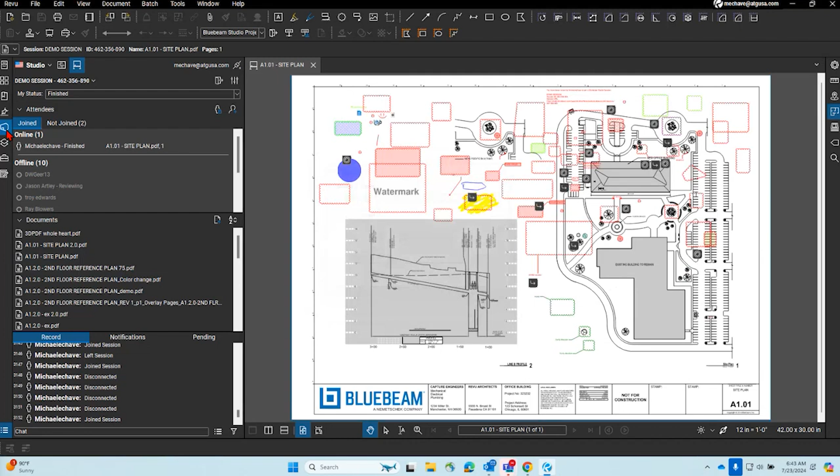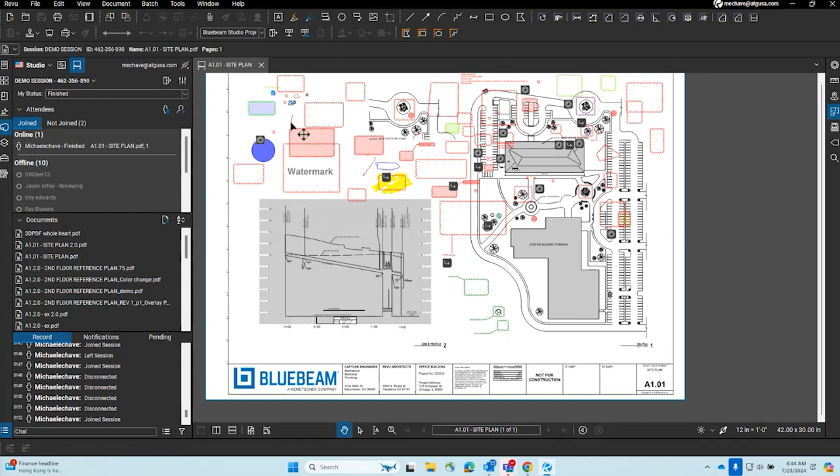I think the one caveat for me, maybe still leveraging the iPad, would be the ability to get tool chest, because you can still have the free non-paid application on your iPad and in a session - this is the old way, in terms of being able to have full access to sessions and the capabilities to mark up in that session on the iPad only. That's no longer the case for the reader version of Revu and getting access to a session. On iPad, that is still the case, meaning you can still access your tool chest in a session. You cannot do that in a session on a free version of Revu, which is their reader version.

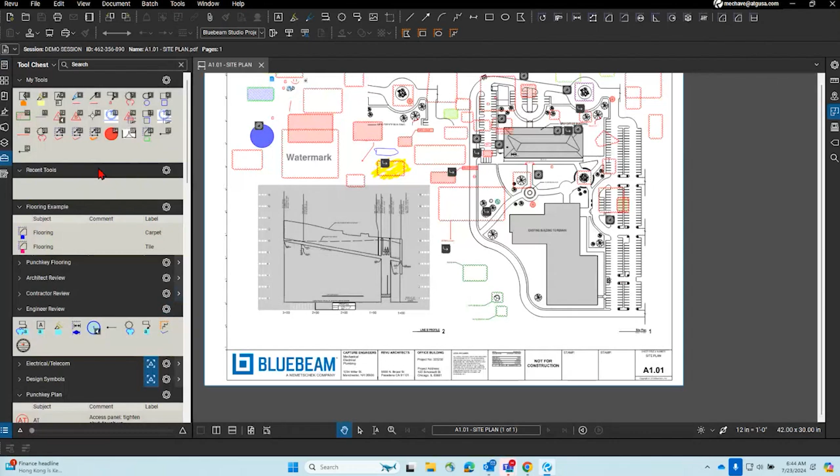So coming back into here, the ability to access your punch list in that manner - if you're going out into the field on your phone, you still have access to a session, which is the new way. So if I'm going out into the field and I want to mark up the same site plan, I can click on this one.

This is the free version, because what I always like to offer is the ability to work with subcontractors. Subcontractors are going to say, I don't want to pay for this - they're not going to automatically say that, I'm just going to go with that as my character for today. I'm not going to pay for this, Jason, but I need to coordinate and mark up with you. What can I do? They can download the Bluebeam Cloud app on their Android device or iPhone, and they can still mark up - they can use rectangle, cloud, ellipse.

You can use a vector pen, which you can't do on the free version web-based app. But anyway, there's text, cloud, callout, highlight, pen, cloud plus, and image.

So I can place an image from camera, or do photo library. And of course my app isn't working ideally, so I'm going to update it on my phone. Keep current selection, tap and drag image - okay, so it's going to be at this building existing area here. How long does it take to populate?

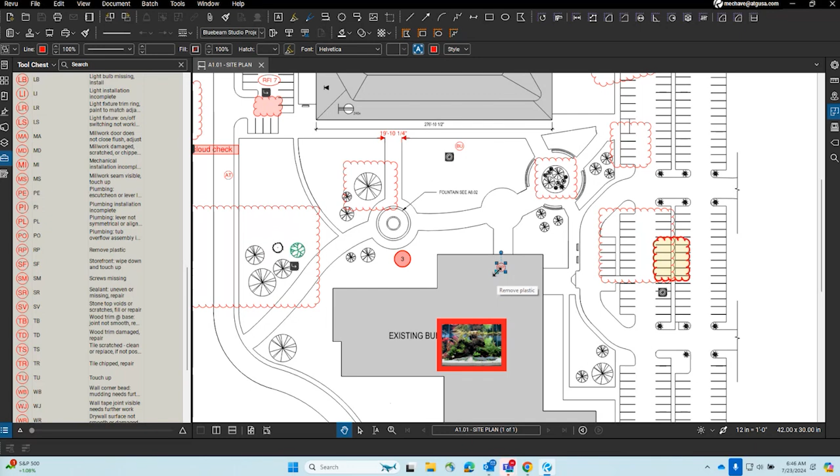I can do a line width - whoa, look at that. So it will allow you to place a photo, which is full res on my phone. Is it full res in here? It's good from what I can see. Yeah, it's almost full res.

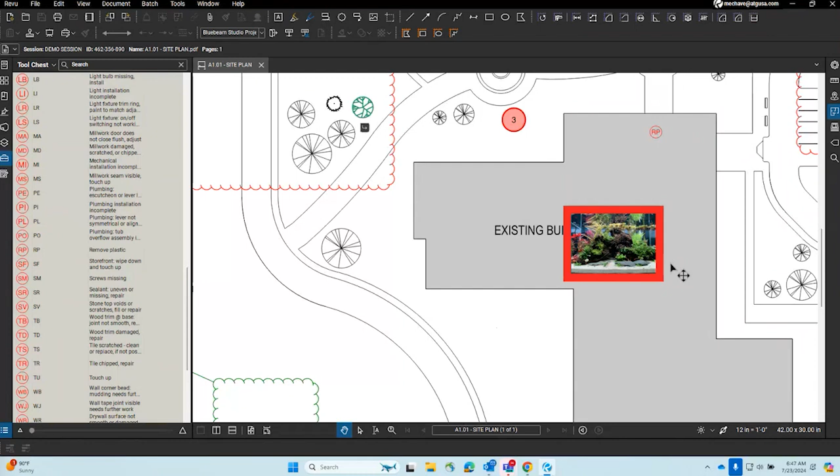So you can throw a photo on the PDF, but can I attach it to an existing markup? That would be my ideal circumstance here. So let me - oh, its markup's locked by author. If I select the image, can I do anything? No. Let me place a markup revision cloud right below it - so there's a revision cloud here that I just placed from my phone. No, I can't attach it. And remind you, this is a free version, and I'm sure Jason has signed into his regular one, so I don't know if it's a little bit different in terms of being able to do that.

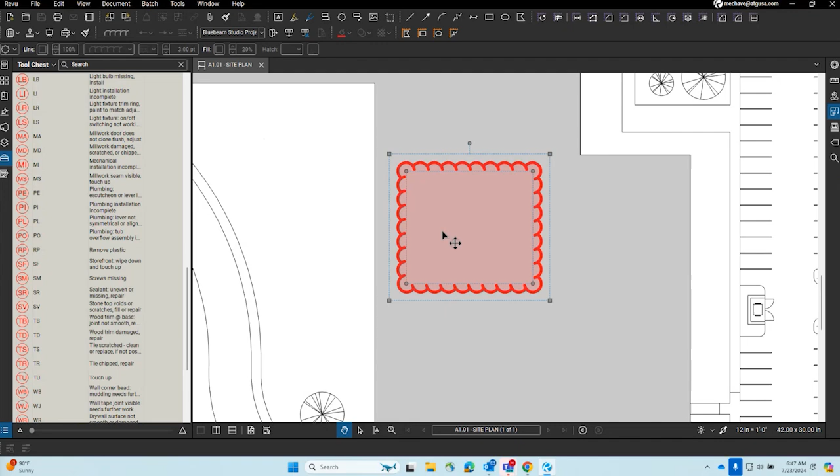But on the web-based version, I remember you were able to change statuses. So if you're out there in the field, you can take a photo, place it, and mark up for any issues while you're out there. It's great graphics in terms of scrolling in on your phone - it's the same type of visual capabilities as if I were to zoom in on the actual desktop application. So the phone does work from that perspective.

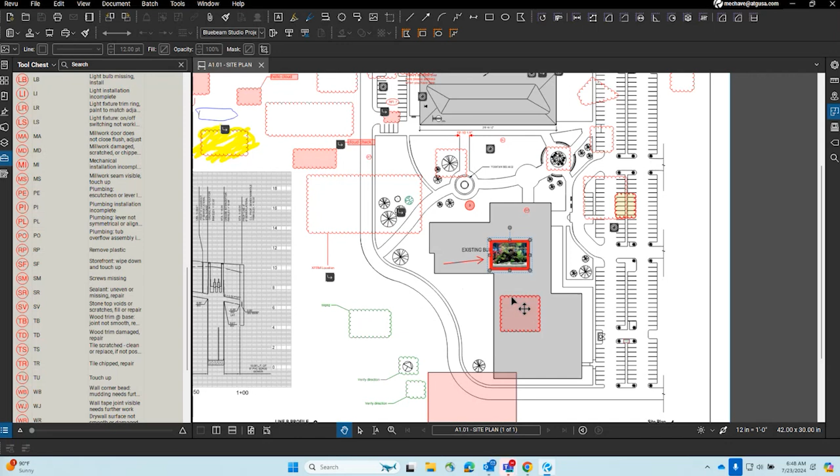You can attach photos - that's the free version if you wanted to invite sub-consultants. And I'm going to assume that it's going to be the same for the paid-for version on your phone for sessions, for markups, because I remember when I signed in first, it was just those options. Is that correct? I believe so. There was talk originally that there was going to be some limitations, but if there were, they're going to be pretty minor.

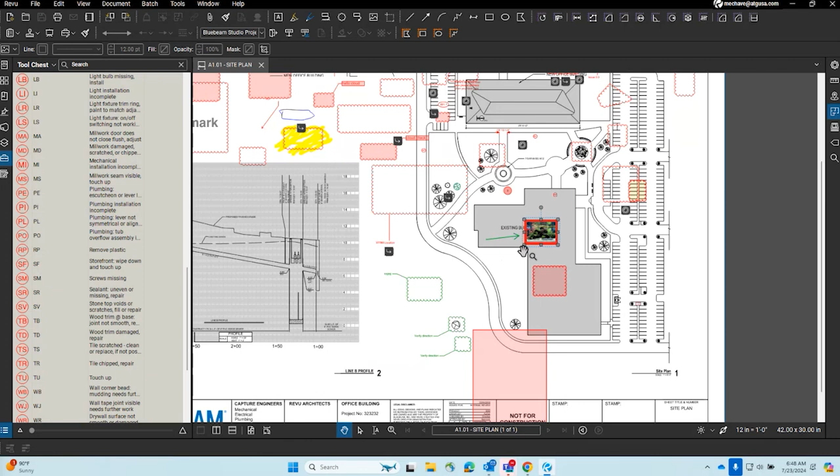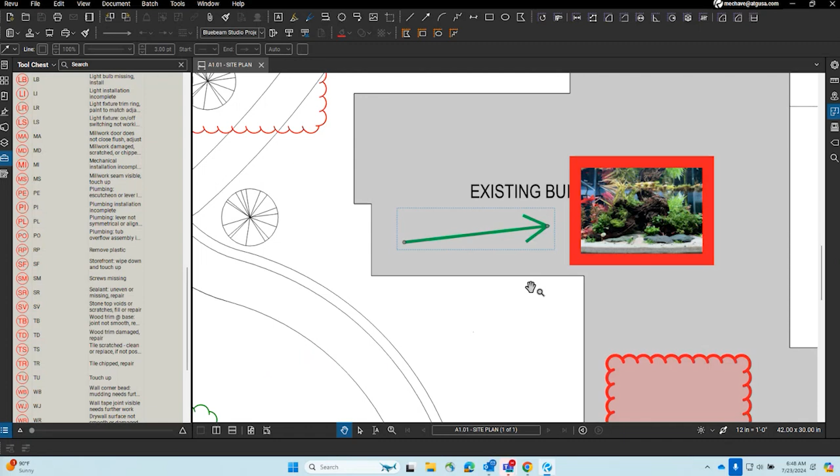So I just made a change - I made that arrow on my phone. It is a little bit of a different workflow. When you first place things, it's going to default to the deep red color. And then there isn't the same properties that you would see in Revu. So in order to edit a markup, you need to hold over it with your finger, and then it will give you the option to either edit or delete.

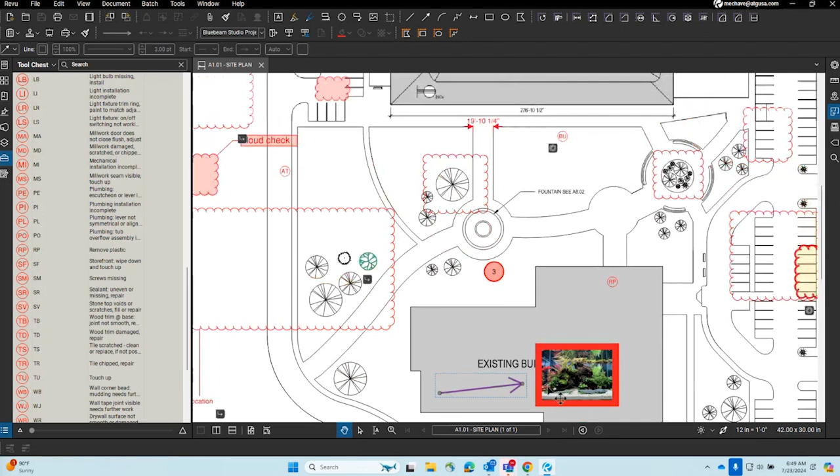If you choose edit, it gives you the capability to change your line width or line color. So I went from green to purple, and there we go. Let's do that again—if I go from purple to blue, you're seeing that happen pretty quick, and I'm doing that from my phone.

Michael's been playing on his phone, but we're still connecting to the Bluebeam Revu desktop product. So if you're in the office managing things, you can be talking to folks on speakerphone, Teams, whatever you need to do, and coordinate even easier, seeing those things in real time.

That's been something we've talked about for a while—the days of sending somebody out to a job site, waiting until 5 o'clock for them to come back with paperwork to sort through. There could be issues found, meaning they have to go back to the job site, which becomes a waste of time—drive time, gas money, all that other stuff—when we could just coordinate this way and be more efficient with our workflows. That's the underlying drive to Bluebeam Revu: let's be more efficient with everything. This is a prime example of that.

They've made this even easier by allowing this to coordinate with people using the website or the app. All you need is a Bluebeam ID in order to do this.

Yeah, I think one of the key factors is the versatility now, right? Because I think what most people wanted was to quickly mark up in the field, and really most of it was workarounds. And then it was siloed information too—I think that's one of the other big things.

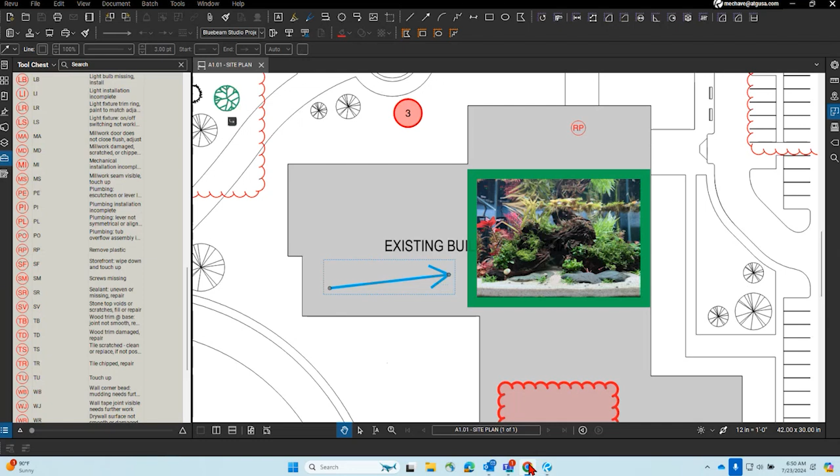If I come into here and go to apps.bluebeam.com, it was siloed information specifically around the fact that if I use projects—Bluebeam Cloud projects is different than what you're going to use for sessions. I know it's going to start muddying the water now because it's projects and sessions, but that's what you have on your desktop application. Projects is completely different than the projects you know on the desktop application—it's built around the constructability process.

But the issue with this is it's siloed information of PDFs, because you're uploading it into here, right? Folks didn't really want that—why am I going to upload into a project? Because if you think about it, we can just upload it into a session and coordinate that way, and it's single source of truth in a session.

So what are they going to do with this? Because this does have great capability to do punch lists out in the field and that type of stuff. But at this moment, now that I have sessions in the cloud, I would personally probably stay clear of this if I want a single source of truth. If we're using something different to track our RFIs and submittals, then I would just leverage this for coordination on the PDF.

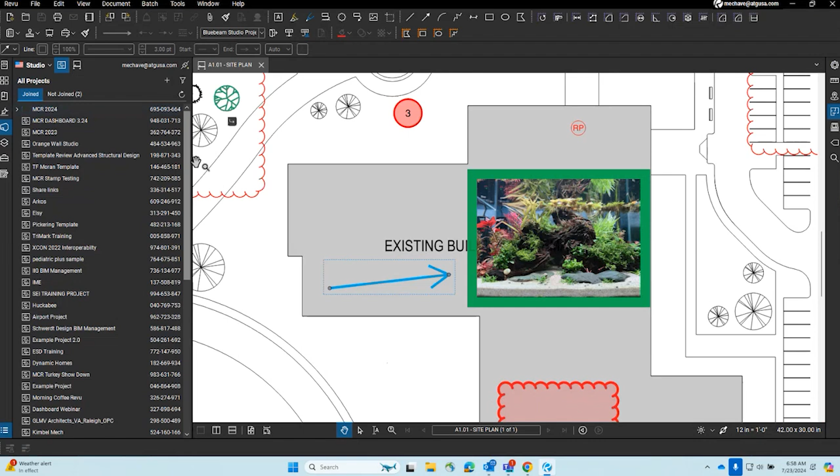It's not a real-time updatable thing. Which would be awesome, because when you're done you could just close this and it updates in your desktop application, but it doesn't. You can export it out - that's when you go to exports, you have that option to export out everything. So go to settings, export your data. I can say, go to that Studio project, but it's not like we'll go look at it. I'm going to store it in here. We're gathering your project data, which will take a couple of minutes. As it goes through and grabs it, we'll look at it, because it's going to be different. Yep. It's exporting, which is not what I want - I want it to just be connected.

So as we wait, I got a squirrel moment. We haven't squirreled in a while. I take it back, we squirrel all the time.

Going back to the Esri conference and talking about connected workflows, there's a new program from Esri called Esri Excalibur. Cool name, right? It allows real-time collaboration between your desktop product and a drone. So as the drone is flying, you're seeing the data in real time, and you can mark up and tell the pilot, hey, you missed a spot, go back over here. Yes, there's a pilot piloting the drone. You can collaborate in real time as that drone is spitting out video data.

So yeah, pretty cool. Baby, we're getting close - super mega ultra cloud. I feel like we could make an acronym out of that. I don't know how long it's gonna take.

And part of that, you're streaming, we've got VPN, we've got other limitations. You can't blame anything here. It also sends you an email too. Yeah, so here's the email.

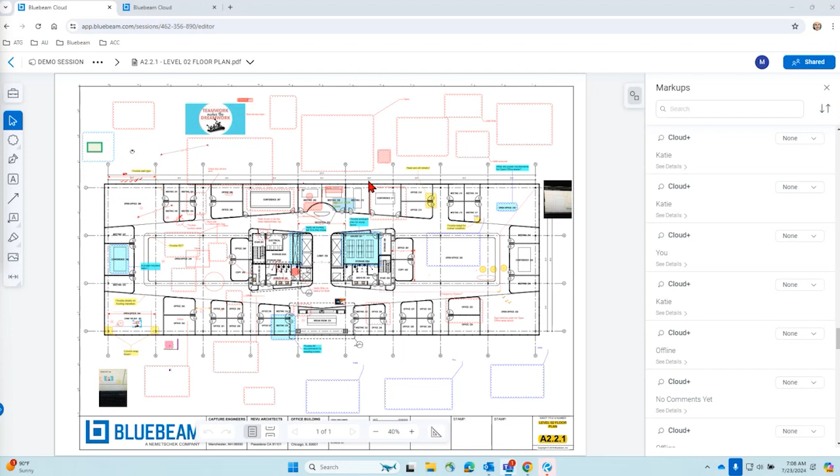Yeah, there are some very passionate people with karaoke that work here at ATG. Oh yeah, we're gonna have to get old Matt Lynn up there. I think he promised, he did promise. What song would he do? Start thinking about it. I don't know, start doing. You got a lot of road trip time where you can practice. There you go, Matt's driving.

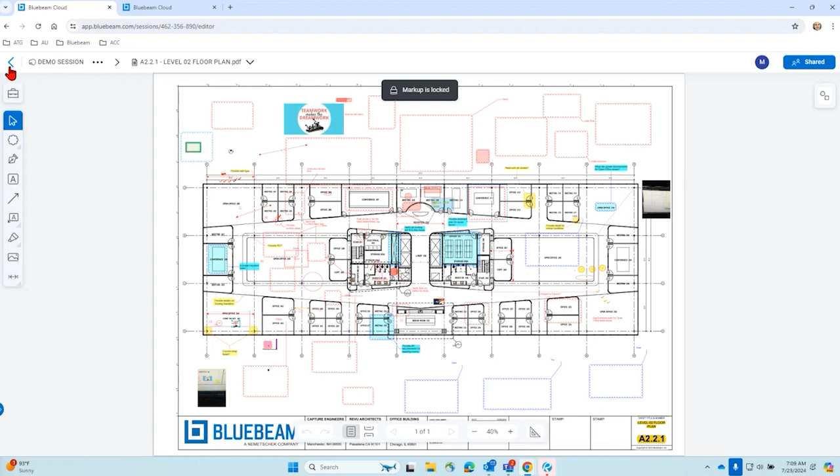So back into projects again, I don't think maybe some folks have used this in the field. We weren't trying to downplay it at all in terms of it not being a good solution. It is, if you're going to leverage it, as it being siloed information.

Siloed information. So from there, I'm going to go to the bootcamp one because we haven't talked about this in a while, and we'll go through and leverage this from this perspective. You have the ability to access your drawings. So you're uploading it into this project platform, which does have access on your phone to leverage from documents, punch lists, RFIs, and submittals. So if you don't have a tool here—and I don't know how I want to frame this, because if I say it's free, you're all going to say, well, Bluebeam increased their pricing, so is it truly free? It's included in your subscription of Core and Complete tier to have access to cloud.

So this is a great tool if you do not have a system, or you're paying X amount for a punch list, RFI tracking, submittal tracking system. Why not use something that's already included in your lowest probably license cost ever?

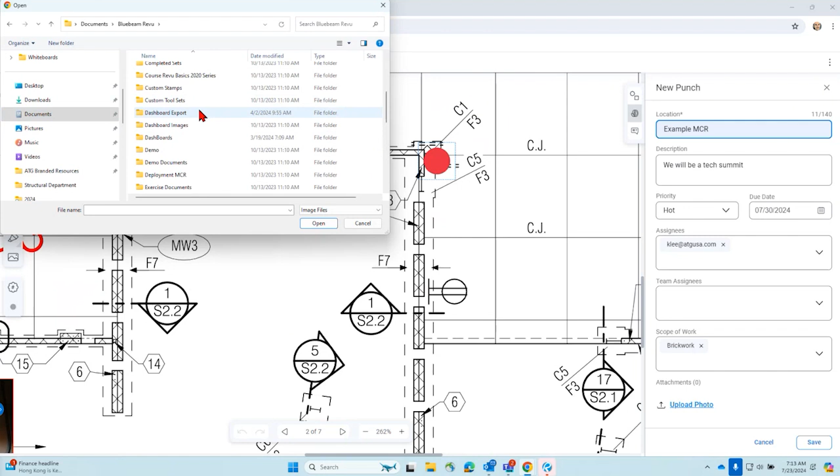Then you can upload a photo. For all of you, I just uploaded a sketch to scale video. We'll go to here. Sketch to scale, sketch to scale—where's my images? So I think it was in my demo docs here. There we go. So there's the image. Hit save.

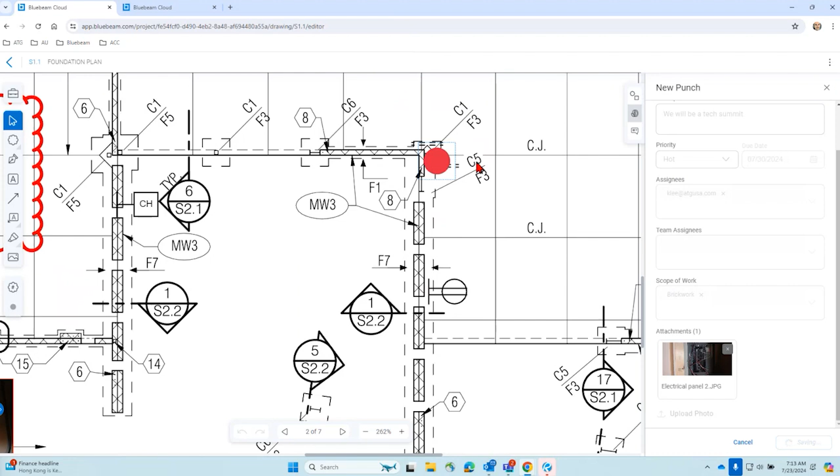And this will be part of the PDF here, but also you have a punch list area, so you can go through and track. So if I was in a different area or a different page, well, let's just go to the actual punch list area. So here's the punch list area. There's the one I just created. You can see where it is on the PDF. You can also have the image for it. And then you can also click this, and it brings you to where that was on the PDF itself.

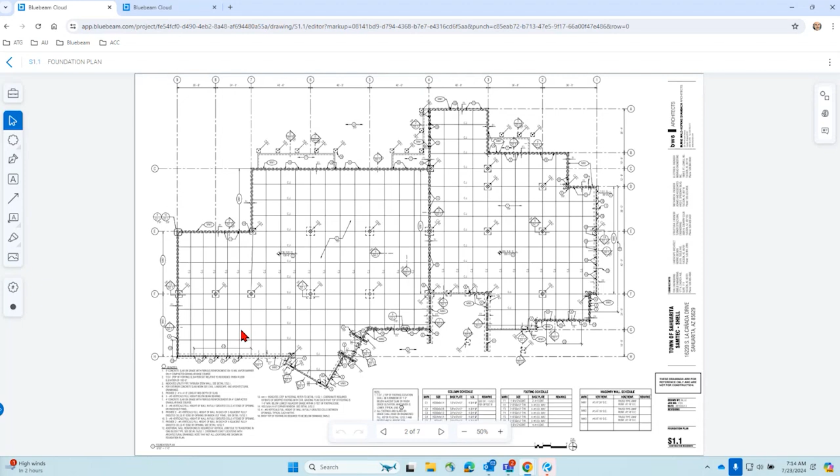Right. So it's still hyperlinked in that true fashion from here.

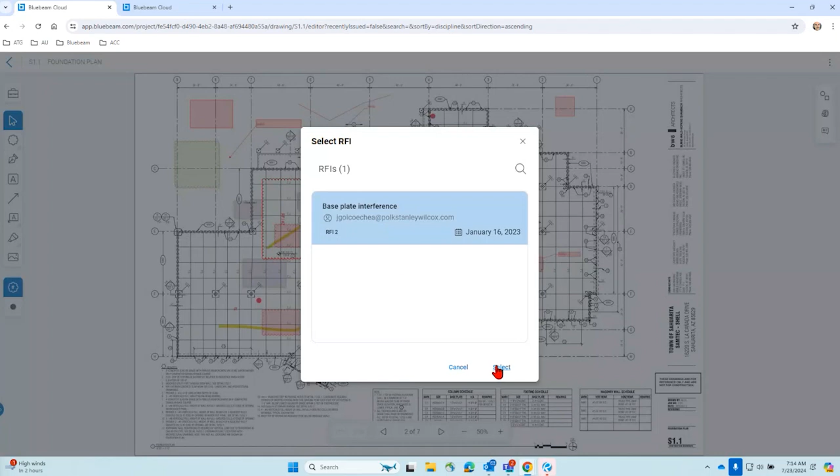Then there's RFIs. You create an RFI and then place it somewhere. People get a little confused with this, but basically you create the RFI, then come into your drawings to decide where that RFI is going to be. You go into here, say RFI, and select which RFI you want to reference in this area. Does that make sense? I think so.

And then you have submittals. So you do have the ability to add submittal logs into here and add a submittal. Then you can see approved submittals as well, which I don't have any in this one. I believe I have some in my first one. But there is the ability to add submittals.

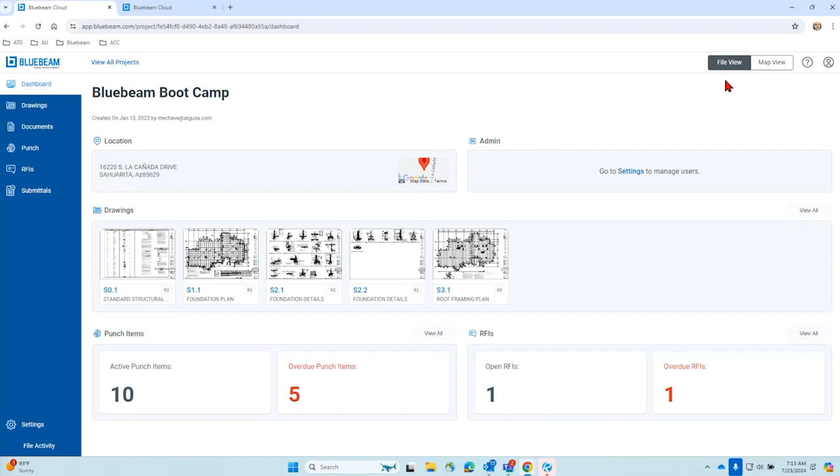And then you have the dashboard. The dashboard also allows you to have a map view. It's a cool dashboard, tells you what punch items you got going on and things overdue. And then you got the map view. And yes, you can still mark up, of course. You have the map view to place the PDF set on the existing location as well, so you have that option with your punch list, your RFIs.

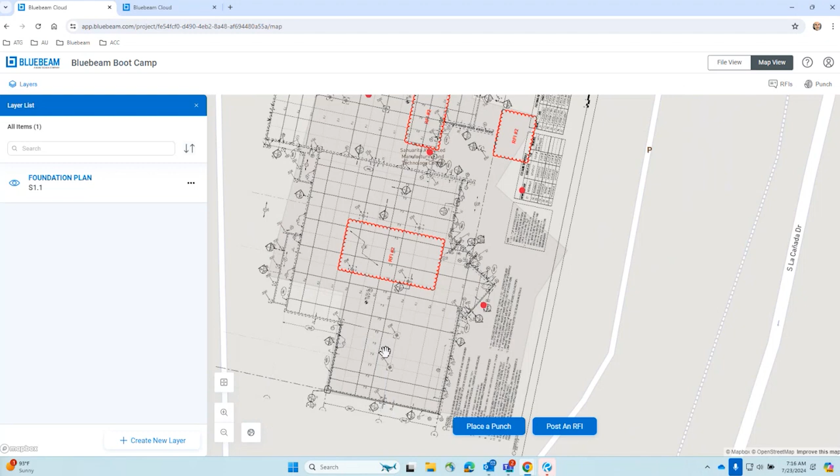You can create additional layers here. I created one too, where I overlaid my PDF on the actual site. If you go to your satellite, it seems to do the same thing yours did where it shrunk down a little bit. I had it placed perfectly, and then when I go back to it, it looks like yours where it kind of shrunk.

I'm so happy they built this. It's really cool. That's something I worked on when I was in industry.

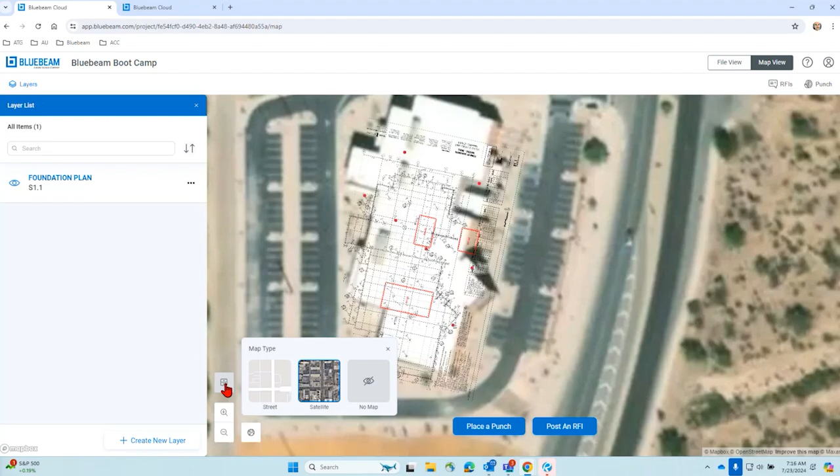So what does this do? Hold on. One time I clicked something and it was going to where I lived, and I was like, 'oh, not a good idea.' So it's not this, that's just recentering. And this is just the view. Okay, cool.

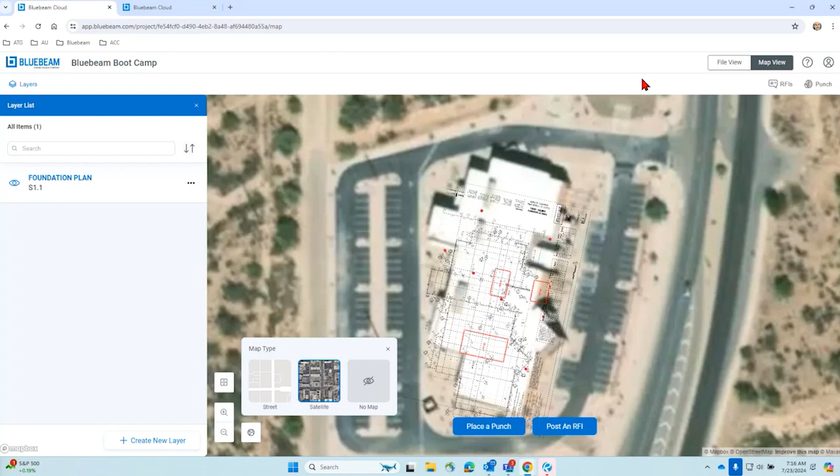There was talk about placing it in a central location, but you're not really doing that, right? Right. So it's not GIS driven, but there was talk of geolocation. I think there still will be as more devices are connected, with your Android or Apple device. The geolocation in there is within about 3 feet, which for the purpose of a punch list is hopefully good enough.

But there are different devices I saw at the conference last week. Bad Elf has been making them for years—a small device, about three to five hundred dollars, smaller than your phone, which increases the accuracy. You Bluetooth to this little device, and it takes the phone's 3 foot range and brings it down to about 1 foot. Or the more you spend, it can get it down to about an inch or two. So super accurate—the better Bad Elf you get off the shelf, the Elf off the shelf.

There was even one guy walking around selling them. I have his card because it was really cool—similar device to the Bad Elf, but he said it would be sub-centimeter accuracy. And they would even rebrand them and put your brand on it. So if we wanted our own ATG brand of these things, he would make them for us.

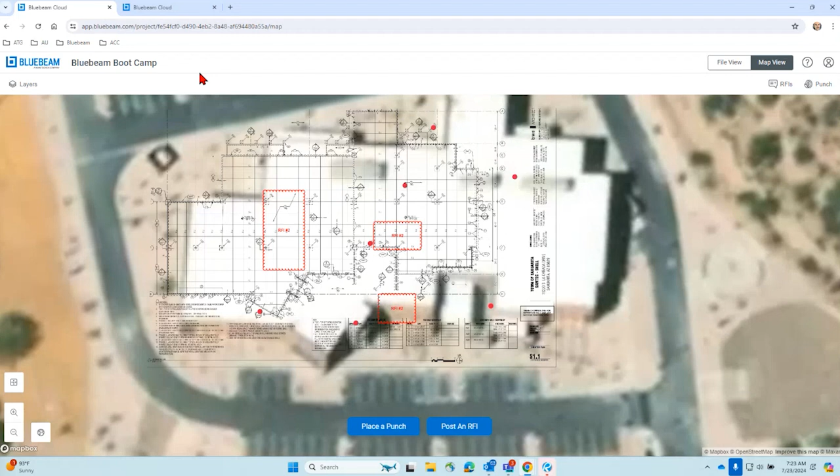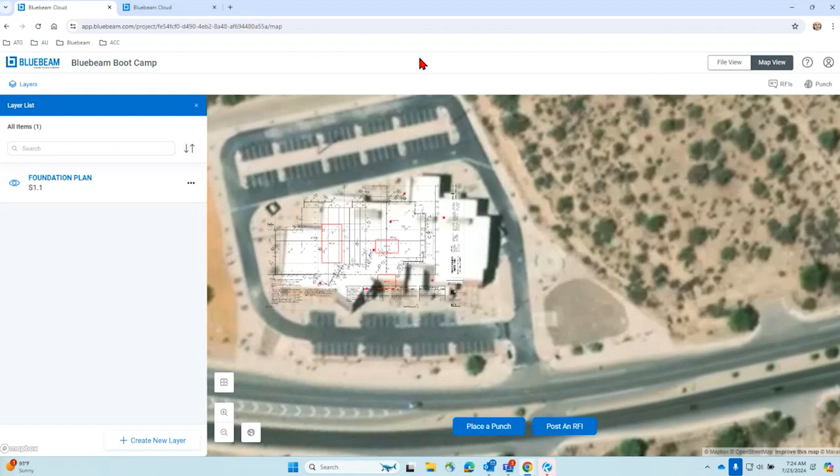Fun times. Okay, so going back into here, you do have that option to attach a photo. On your phone, because I've done this before with my punch items, you're able to do capture. So if you're out in the field and you're worried about creating a punch, instead of upload, it'll say capture, so you can take a live photo as well.

Let's try to tune back into my MCR one here, and it still hasn't uploaded. I don't know if it's going to create its own file, because it should have created a PDF package. That's what it's done in the past, and it still hasn't gotten one here. I'm assuming there's a lot of files because it said it did.

Oh, cloud export into MCR 2024. So let me just refresh. Export. So you can refresh, just so you're all aware.

There it is. If you're in a project, the data may not have gotten there. If you're using projects, sync means that you're syncing the data locally. So if you disconnect, that doesn't mean it's going to automatically update whenever new ones come out. Refresh means that it's pulling new data back from the cloud. So that's why I was able to see my zip file.

So the zip file exported it out, and now I have this in my folder structure. So I have drawings, punch. Here's my punch report.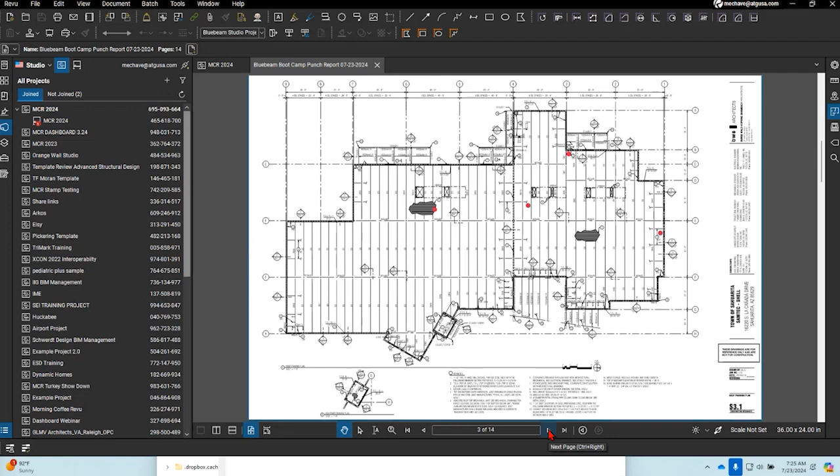So again, you do have that access from here as well. You can download it, but again, it's not live data. Matt, you asked that question earlier - is it live? It's not pulling and pushing from projects, unfortunately. Sessions it is, but not from projects to Bluebeam Cloud projects, which is even more confusing.

As soon as they added sessions in the cloud, you're like, oh, so there's sessions and projects. That's what you have on your desktop. But actually, sessions is the same, but projects isn't the same. So let me just confuse you more. They're going to have to call it something else. They need to, yeah.

So with that conclusion, we talked about some of our capabilities to leverage the solutions out in the field. You can mark up now on your phone, your mobile devices. Still begging the question, as we started at the beginning, was thinking of not having or needing an iPad. I guess if you have poor internet connection, that would be a great device to cache local, and then you can walk out to the field and not worry about connectivity. If that's something you're cautiously worrying about, depending on where that location is of the field, you may have a couple devices depending on need.

But if you have great internet connection, and you're visiting a site that is finally constructed, and you're just going through doing a walkthrough, there may be better internet providing there as well. Then you could do your punch list from your phone. You can go through and use the cloud platform, but again, siloed information. So it just comes down to us telling you what you have capability-wise and letting you make that informed decision on what works with your workflow.